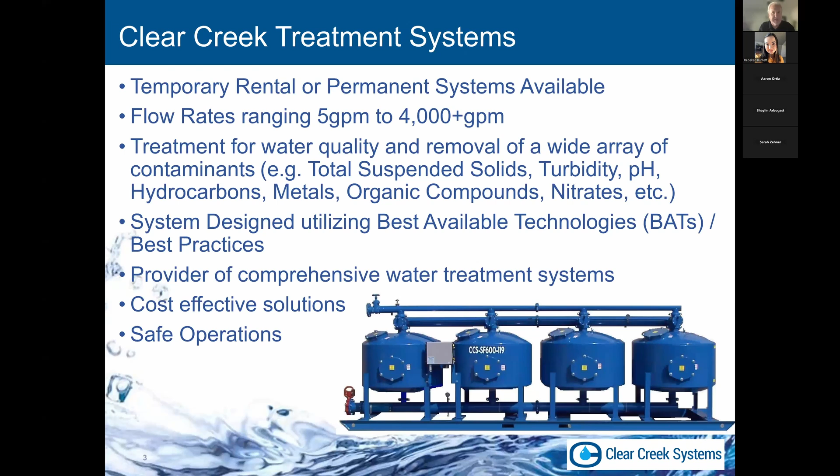Here at Clear Creek Systems, we provide a wide range of equipment and technologies. We're pretty much technology agnostic in terms of solutions that we sell. We don't sell a widget, we sell a solution. The solutions we provide are meant to be efficient, cost effective, safe, and easy to operate and maintain.

What we've learned in 30 years of business is that all industrial stormwater treatment sites are unique. There's no exact formula for success. It's often a combination of technologies that comprise the final solution and ensure compliance. When I talk about compliance, I'm talking about complying with the industrial general permit, both as it is written now and how it might be written in the future. We're not in the business of supplying you something today that won't work in the future with increasing regulation.

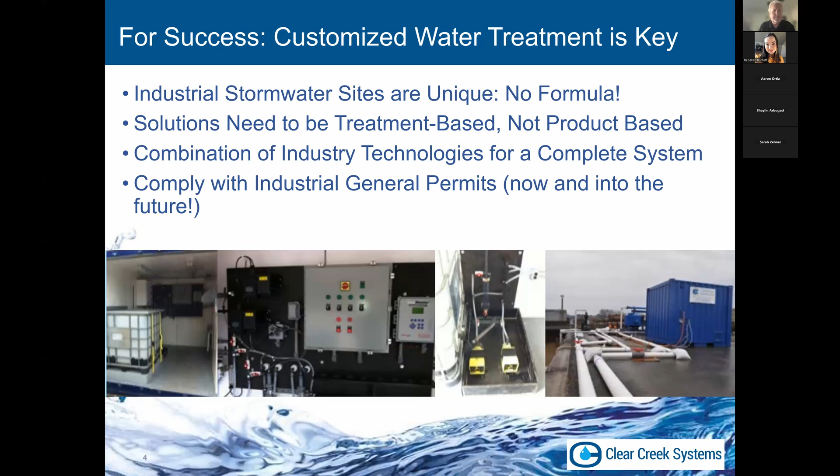Today I'm going to present some of the key techniques and potential configurations used to treat stormwater problems. We're going to meet the needs of regulatory authorities, our clients or customers, the workers' needs so they can do their job safely and efficiently, the needs of litigators or other interested third parties, and finally, what it's all about—meeting the needs of the environment. Make sense?

Planning ahead saves a lot of headaches, and that's something I want to drive home here today. By planning ahead, we'll reduce unplanned expenditures, overspending, and using solutions or technologies that are less than ideal. A systematic approach is directly related to cost savings here.

With that in mind, I'd like to start at the very beginning. This is what planning kind of looks like, if you ask me. We need to take a holistic view of the facility and the current situation.

We look at the stormwater pollution prevention plan. We look at NOIs on the SMARTS website, which give a great history of what our clients have been up against. We'll take a look at any drawings available of the existing facility so we can get a good idea of the layout. We're going to know which permits apply, and we won't forget about any local city, state, or county permits that need to be procured if we're going to put in a treatment system.

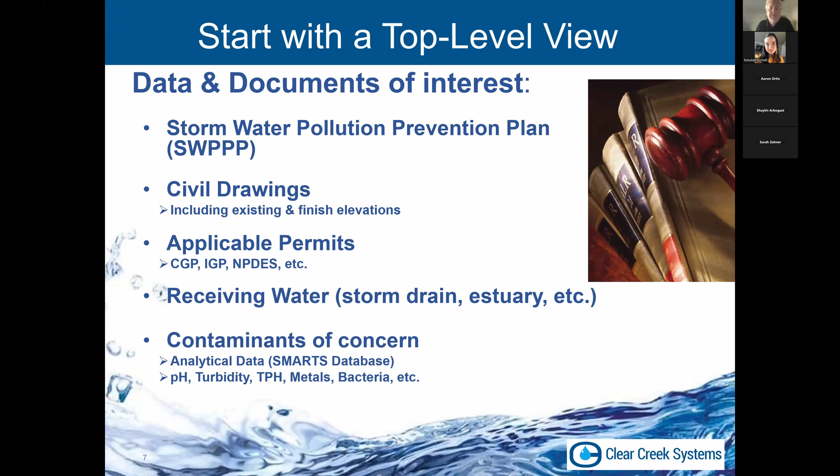When we supply our services, we want everyone to have made all other attempts to get in compliance. That means all your BMPs are being complied with, all your housekeeping attempts have been completed. In a way, your treatment system needs to be a last resort for compliance. These things cost money and take time and have ongoing costs. If you can in any way take care of your existing facility without a treatment system, you should do that. This should be a last resort.

Nobody wants to spend money that they don't have to spend. Usually the customers that need treatment have tried everything, but I just want to underscore that point. So when a project does come to us, the problems are often due to one of these problem areas. I'm not sure if everybody would have heard these terms before, but I'm going to mention them.

TSS, also called total suspended solids, short for total suspended solids. Oils and greases get in the stormwater from leaking trucks or any number of machines that might be operating. pH could be out of whack. Total dissolved solids - these are solids that won't get caught up in a coffee filter or a paint filter. They'll just move right through, like water. Metals, including dissolved metals, VOCs, BODs, COD, bacteria.

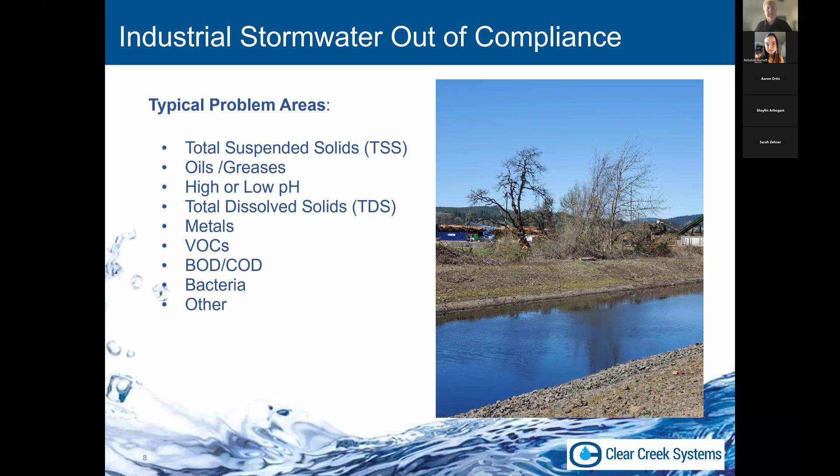Once we know what we're up against, we can start to determine treatment. This is kind of my most important slide that I want to show. If you take nothing else away from this presentation, I'd like you to be familiar with this slide. For each problem encountered, there's a best practice and sometimes a combination of best practices for treatment. There's no formula, no off-the-shelf product that is going to work every time. Each site should be looked at on its own, and that's what we try to do.

Technology providers should come up with a system for treatment that is effective and cost efficient. You don't want anybody trying to sell you a reverse osmosis system if that's not what you need. Effective and cost efficient are a baseline that we need to stay on.

Any provider of any of these stormwater treatment technologies should offer bench testing with actual stormwater from your site that incorporates the proposed treatment technology. We will do this to kind of ensure effectiveness. There's also something called pilot testing, in which a system is put at the site temporarily to prove treatment. It effectively tells you how well it's going to work before any large capital outlay. So bench testing always, pilot testing sometimes - that's the best option.

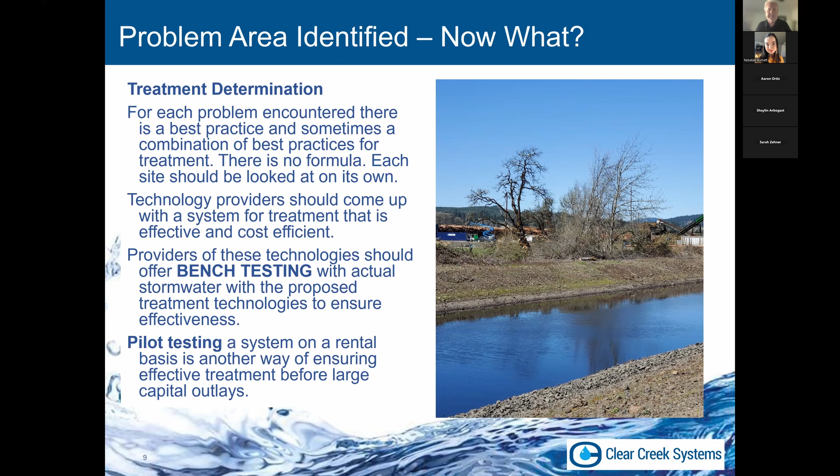So the problem areas often start with things like TSS and pH. TSS, total suspended solids, can be comprised of a lot of different materials - clays, organic debris, metals that get flaked off, even things like leaves and so forth. pH can play havoc with your water chemistry if it's not in the neutral zone. Whenever we're treating stormwater, we want to make sure that these two parameters are under control. It's usually the first place we'll start.

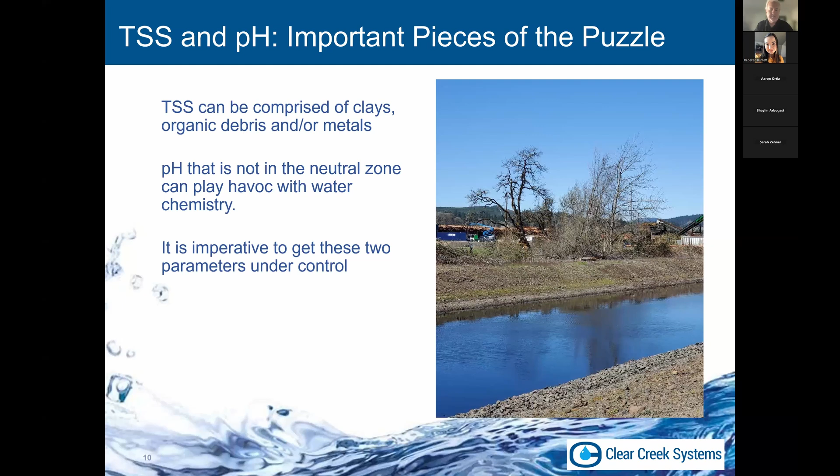I'll often talk about TSS and turbidity, and while they're different measurements, they are related and often go hand in hand. Turbidity is used as a surrogate measure for TSS because it allows for rapid automated analysis of samples. You can measure turbidity in the field, on the fly, online, right away, as existing water quality. You don't have to take a turbidity measurement at an analytical laboratory. It's more convenient for frequent or continuous monitoring.

However, for the lay people, it's crucial to understand that turbidity and TSS are not measuring the exact same thing. Turbidity measures the clarity or the cloudiness of your water based on light scattering properties. TSS is a direct measurement of mass particles suspended in the water. Hope that makes sense.

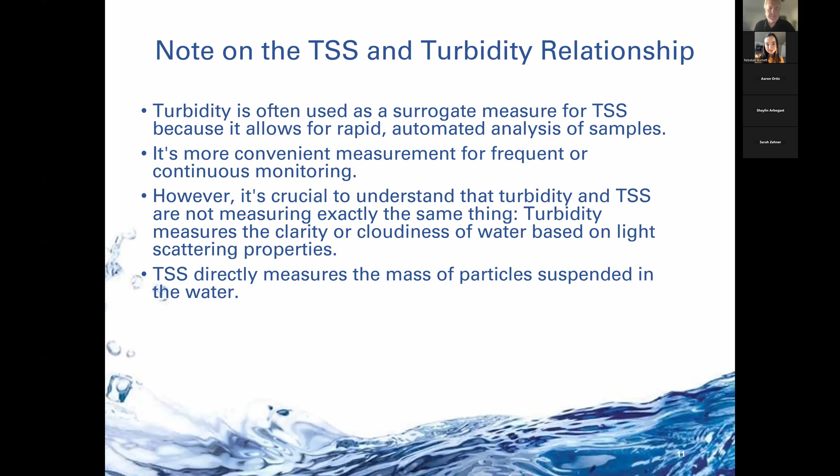I don't know if you ever saw puddles on the side of the road that look like chocolate milk, and they stay that way for days until the water evaporates. Those are signs of clay in your stormwater.

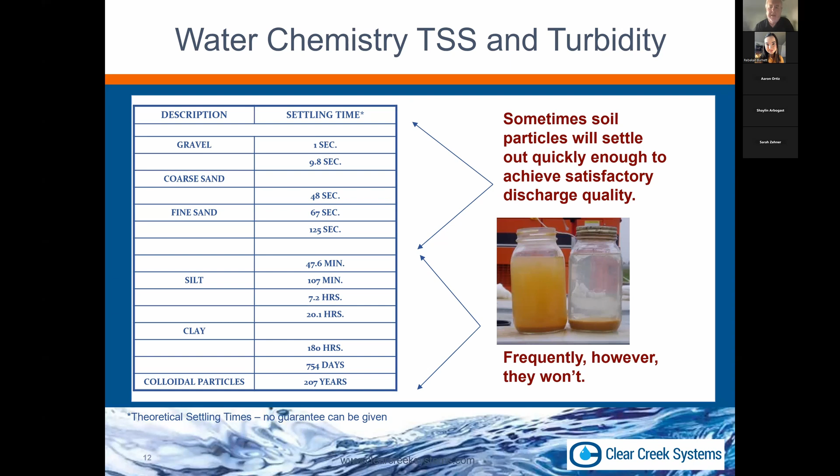One other thing before I move on, I want to note the settleable solids on the right jar. I'll refer to that a little bit later, in a couple slides.

With reference to water chemistry, I know probably everybody knows what pH basically is, but it's important to understand that it's a logarithmic scale. We want to be as close to neutral as we can, often before we discharge. High pH is more alkaline, low pH is more acidic.

I just want to remind people that pH is a logarithmic scale. So a pH of 5 is 10 times more acidic than a pH of 6, and a pH of 5 is 100 times more acidic than a pH of 7.

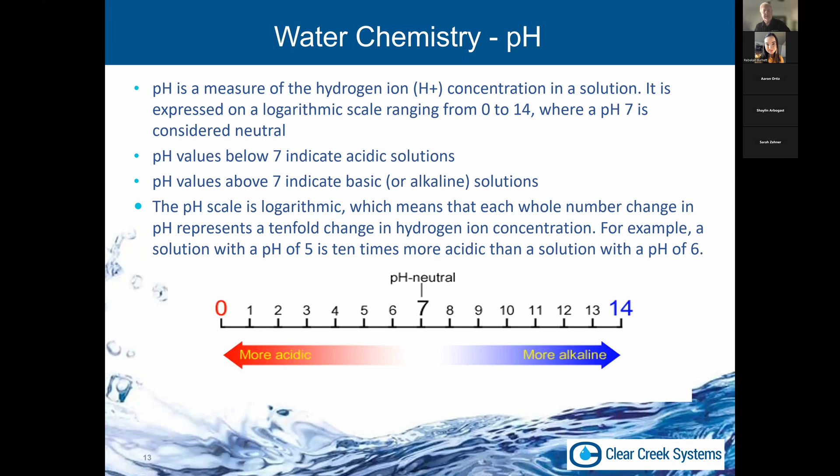Once BMPs are in order, there's not really a lot you can do to affect pH at your site if it's not in the neutral range. When we discharge stormwater, we shoot for between 6.5 to 8.5 on the pH scale. I think the rule is 6 to 9 by the permit, but each site is different, and pH issues can be the result of a lot of different things.

Materials of construction—some galvanized roofs like to give off zinc, for example. Exposed concrete surfaces leaching alkaline compounds. Other natural factors, including local geology, can influence the pH, and decomposing organic matter can affect pH as well, like algae in your ponds.

Things to keep an eye on. Of note, pH can actually be used as a tool to reduce contaminants in your stormwater, so pH changing up and down can be beneficial to treatment. It all depends on your particular situation at your facility.

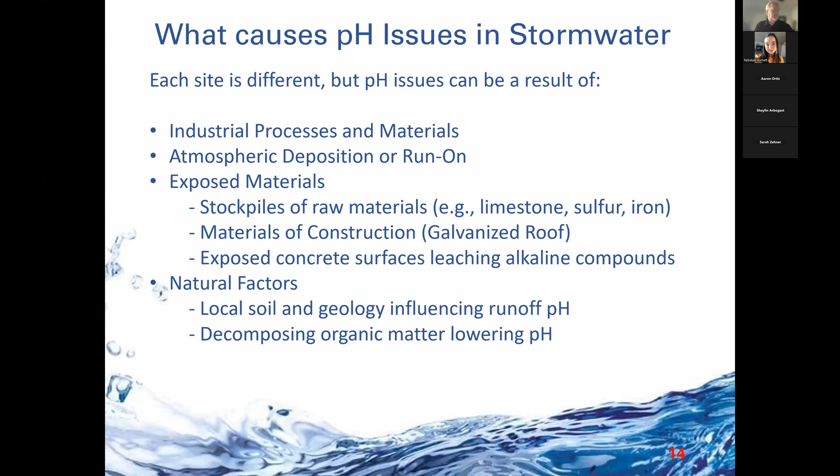If you remember those two jars in the earlier slide, the one where solids separated into a layer on the bottom—we use a grown-up version of those two jars in these photos, except we call them ponds, sumps, or tanks. Here we collect stormwater into a central area, allow it to settle out as much as it can, thereby reducing TSS. It also allows for an overall pH baseline for the entire facility, so if you have a particularly acidic or basic area of your property draining, the rest of the water may tend to dilute that into a neutral solution.

This serves as the main collection area. If we can use the main collection area rather than a lot of different satellite collection areas, we're going to end up reducing a lot of the costs for treatment.

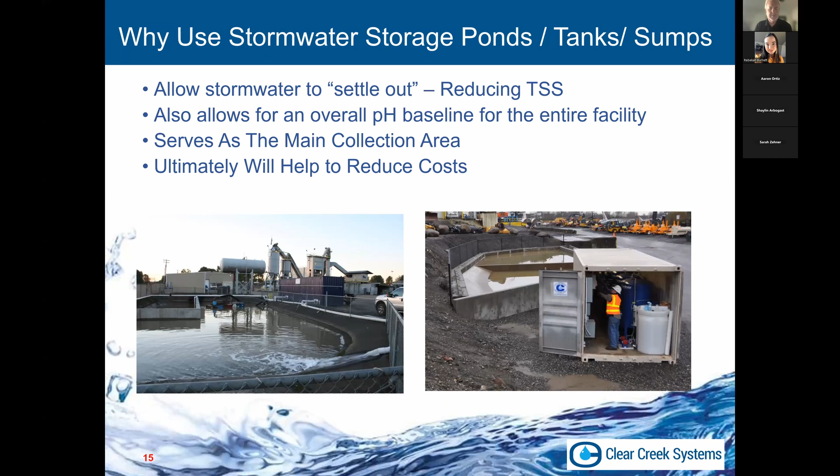From here, we're going to take a deep dive into a treatment train and explain the basics of an industrial stormwater treatment system. Not all of these components will be required—some sites might require more or different components. This is just an introduction into what a treatment train would look like for industrial stormwater that had a lot of different problems.

For a high-acre site, these systems can become quite large. We want to plan drainage to the collection point, our basin, sump, or pond. We want to try to use gravity to move water around, or do we have to pump stormwater from one site to the other because gravity doesn't work in our favor? These are things we should plan for.

Is there space for treatment near the discharge point, or are we going to have to pump a long way to discharge treated water? Is there electrical power at the site, or is that a concern where we need to bring in power poles?

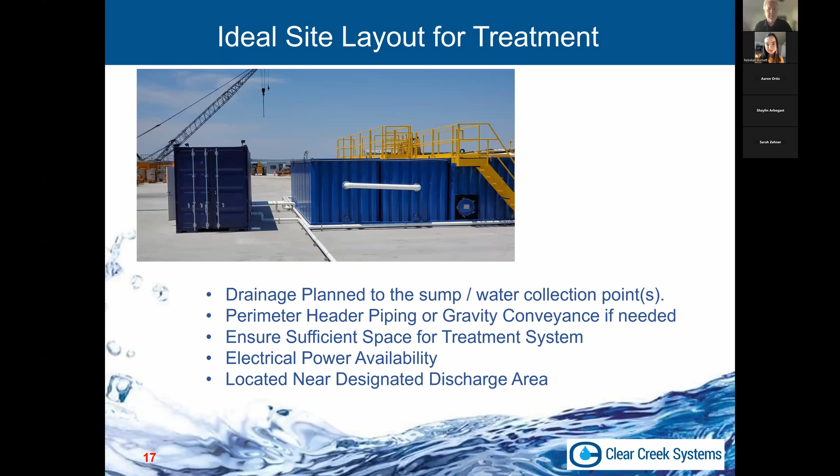Sometimes there's no space, or space is at a premium. We can put a tank underground. This would be an underground water storage tank at this facility.

There are a lot of different options, but I want to point out that this time of year I always seem to get a Stormwater Awareness Week notification. It's perfectly placed because it helps me transition into the stormwater season, and I'm reminded that dry weather installation is always preferred compared to a wet weather installation.

If you have a problem, now is the time to start planning. Don't wait till your next lab result comes back and shows you still have a problem. There's nothing wrong with doing a little planning right now so you can be ready, once storm season approaches and we start to get inundated—that's the busy season for companies that do what ours do.

First in line is often the first one that gets helped, and the timeline gets extended when everyone waits to the last minute. That could potentially lead to increased costs, increased fines, a need for overtime.

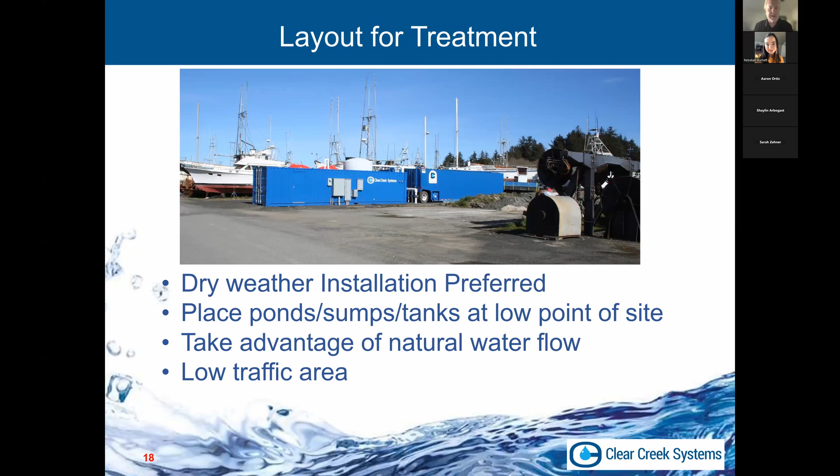So we're in our storm season now, and we have our collection basin, pond, or sump. Some solids will stay in the basin, just like in that jar I showed earlier. But we're going to start to need to treat water so we can make room for the next storm coming in, and hope you're ready to go through the process.

This is kind of a deep dive, but this is exciting stuff here, and this is where the magic starts to happen. This is the crux of what I wanted to present to you guys today.

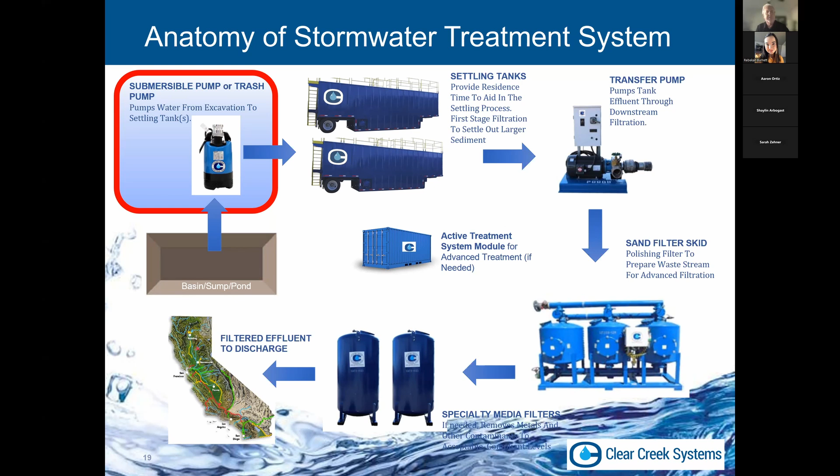From our sump or basin, we need to start pumping that water. The water that comes through for treatment is often pumped with one of two styles of pumps: submersibles, which can be completely submerged into a pond, or trash pumps, which sit on the side of the pond. And they each have their benefits.

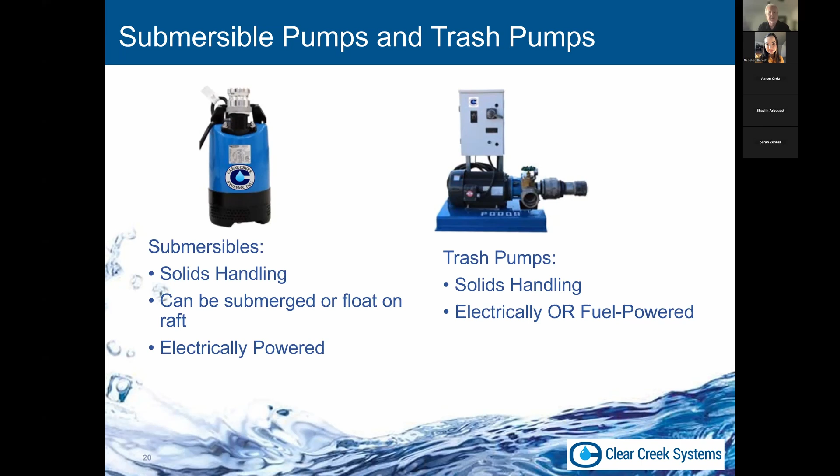Submersibles can be submerged or float on a raft. The trash pumps usually sit on the side and can be electrically powered or powered with an engine—a diesel engine—or a generator. Either one could be powered with a generator. These are the common ones used for pumping out of our pond.

What does that pond look like? It could look like a lot of different things. I'm not saying this is an industrial stormwater treatment pond, but they can get really murky and dirty.

In this case, we have our pump set, and we have our submersibles, which are floating on a raft. If we put a submersible pump into the bottom of our treatment pond, sitting on the ground, we're going to be stirring up a lot of that stuff we want to settle out.

So rather than sucking up all that muck on the bottom, we usually try to suspend them either floating on a raft or some other means, so we're not sucking right from the bottom. Same if we're going to use one of those trash pumps—we'll put the intake for the pump slightly above the ground level so that we're not sucking in all that dirt and debris.

This is one safety thing I like to point out too, every time I show this slide: these ponds can be muddy, they can be slippery, and the sides can be steep. Please consider putting some kind of flotation device there in case somebody falls in and they can't get out—say, like they're doing an inspection in the middle of the night, for Thanksgiving when nobody else is around.

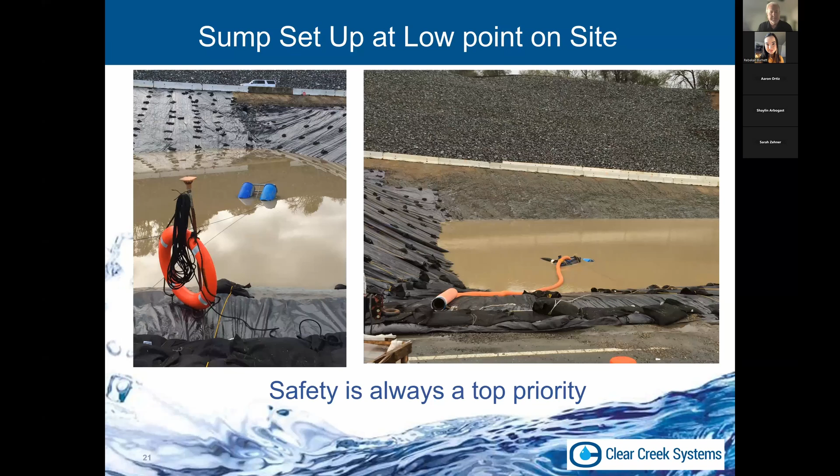There needs to be some thought given to that if you have an unsteady area to work around these ponds. All right, so we're pumping from our basin, sump, or pond into some settling tanks.

The idea of these settling tanks is to give another area for water to settle out. So we have our basin sump pond. It's dirty, you saw the picture of what that could look like. Now we're pumping water out.

We're going to be able to get water into these tanks and settle out some of the solids that get swept in. These tanks also allow for a little bit of equalization from the water pumped in from the sump and pond. In a rainstorm you may get inundated into your basin, sump, or pond. These settling tanks allow for equalization, meaning a steady flow rate through the rest of the system. It's kind of a buffer. So a lot of things going on, but we're getting additional settling and equalizing flow so we can operate at a steady rate of flow.

Of note, one could use another pond instead of these tanks. I didn't show that pond, but I thought I'd mention it - you don't have to have tanks if you have the real estate for another pond for settling.

Some quick notes on tanks. Commonly known as frac tanks, or used to be known as Baker tanks. They're pretty easy to come upon, not that expensive, especially if you can find one used on the market. They're a little tight at the moment, but they come and go in terms of how available they are.

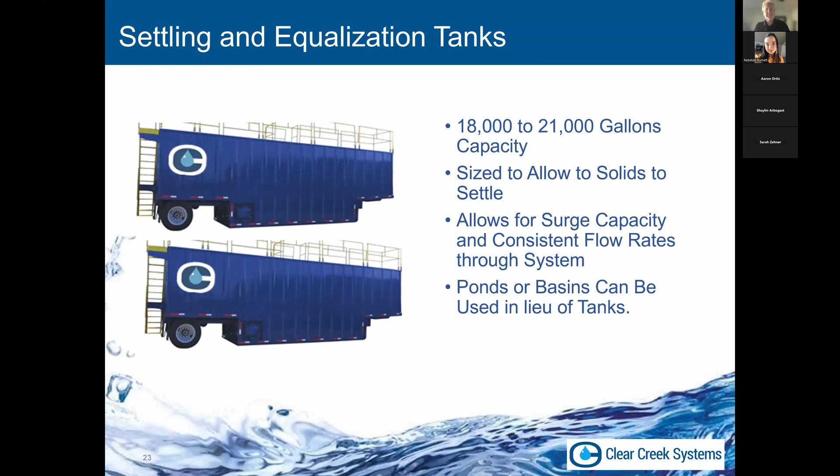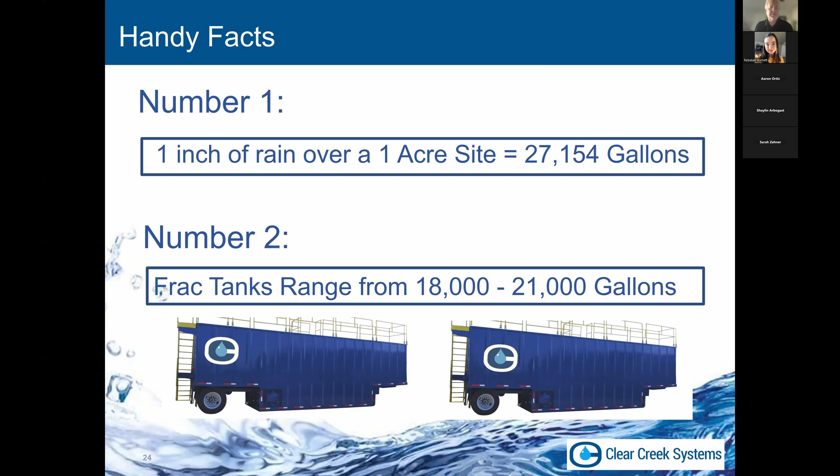A couple of handy facts, just to give a perspective: an inch of rain over a 1 acre site, you're going to collect about 27,000 gallons of stormwater. And again, the frac tanks are 18 to 21,000 gallons. So you probably would want at least one or two tanks in that scenario. But if you have multiple acres, you can do the math and figure out basically how many tanks you might want to have.

So now we're going to move on to another transfer pump. It's very similar to what I already showed you - nothing too different, except that we hardly ever see submersible pumps in this area. It's always going to be a land-based pump hooked up to some kind of electrical power, and these pumps are sized for your treatment rate. So if your QISP tells you you need 400 gallons per minute, you're going to get a 400 gallon per minute pump, and that pump will be sized to overcome the pressure drop through the various treatments that follow.

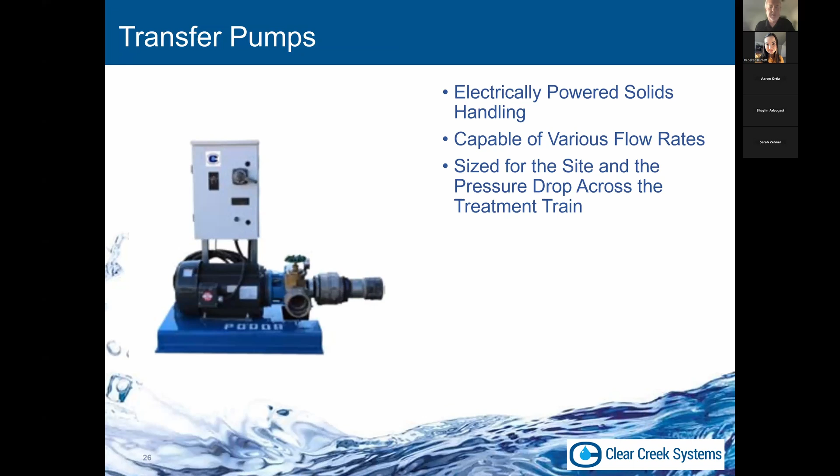Now we're ready for some filtration, and personally, I like the use of a sand filter, and I'm going to talk about that sand filter a little bit.

There are different types of filters - bag and cartridge filters. The thing that separates the sand filter from bag and cartridge filters is that when the bag filter fills up, somebody has to stop the system or close off flow, open it up, and change out the filter sock, then put it back online. I've been around long enough to know that's very inconvenient when everybody's off at Christmas, New Year's, and Thanksgiving, or if they have other work to do at the plant - they cannot be running out to the water treatment system to change bag filters every 5 minutes, 10 minutes, hour, 12 hours, or even every day. It can become a nuisance. I like the idea of the sand filter because sand filters will automatically backflush themselves.

They'll automatically clean themselves. Each one of these four pods I show here contains a layer of sand and gravel, and water flows through the top to the bottom and out the bottom, in this case to the left. On prescribed intervals or on a pressure differential, the sand filters, with the control panel there, will backflush themselves. And where does that water go?

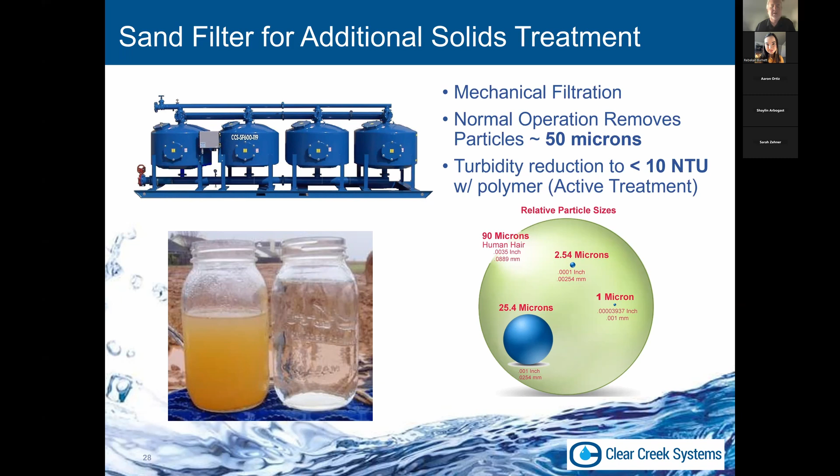Often, with the correct polymer selection, we can reduce turbidity to 10 NTU after sending the water back through a filter, and that's kind of what's represented in that picture. So one jar is prior to polymer introduction, and the jar on the right is with polymer introduction.

So how do we know if polymer's needed? Well, when we do our initial site reconnaissance, we're going to know if TSS is high. We're going to know when we do our bench test that TSS is high, and how certain polymers will react, and we're going to measure that coming into the system.

If we're out of compliance, we're going to again retreat with additional polymers. And if there's a reason why our turbidity remains high, those tanks will fill up. Obviously, the water won't be allowed to go anywhere, it'll go in a circle. And once they reach a high level on that tank, the system will shut off and alarm, and somebody's going to get a phone call that there's a problem.

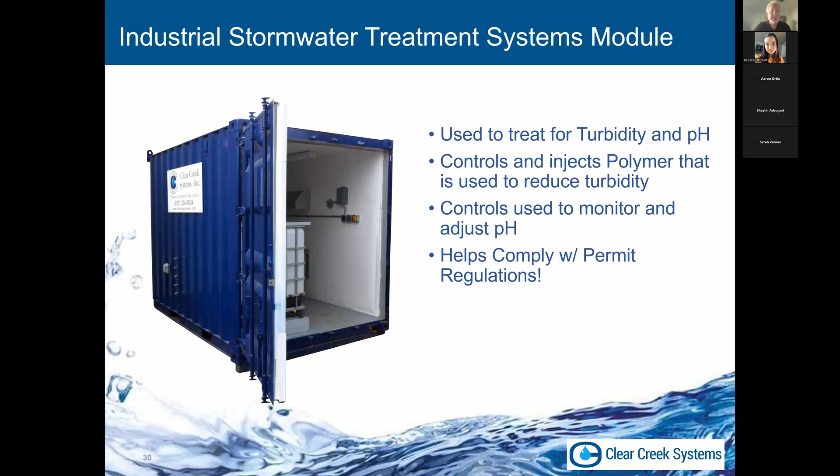So as we saw in my previous slide, the fine particles can get through our sand filter. If we dose the stormwater with a special polymer, our first go-to is something called chitosan. It's called chitosan, and that is made from crustacean shells.

They're becoming bigger and bigger. And as they get heavier or less buoyant, and the charge on the particles starts to equalize, they start to fall out. And a lot of times it doesn't take a lot of time to do that. It's another reason why we ask for about 20,000 gallons of storage for every 100 gallons a minute, to allow these particles to fall out.

The whole idea is to fill up those tanks with sludge and TSS. We don't want that, but it has to go somewhere, and yes, it becomes a maintenance item. Those tanks over a storm season, and your pond for that matter, can become feet thick with solids, and you will have to vacuum those out once in a while. But that's the whole idea, to get rid of this from your stormwater.

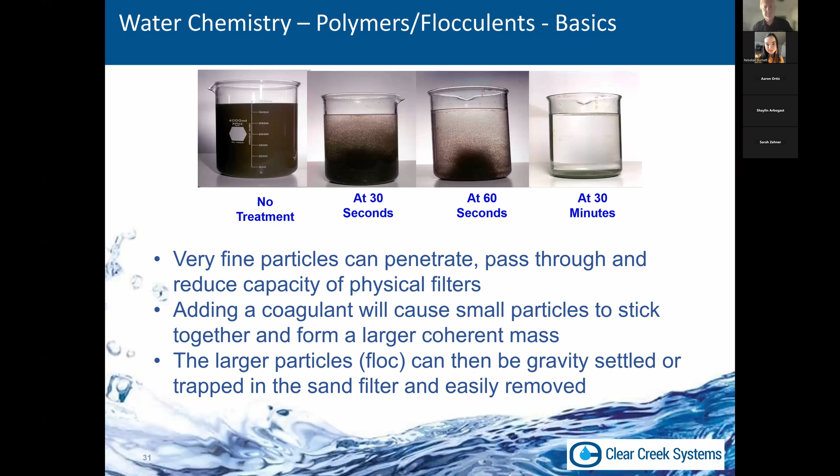Again, just some other photos of how that works out. Small particles bind together to make large particles, so they fall out of solution. Particles are then effectively filtered.

One other small minor point here, but I feel it's very important, is that if you have a contaminant concern like nickel, copper, lead, or iron, and that's coming through in your lab work, and you don't know if it's dissolved or not - even if it is dissolved, we find that these metals are often attached to these particles that we're filtering out. So if we can filter out the particles from the water, we're oftentimes taking out those metals as well. It becomes like a double-edged sword, where we can start to make headway on our stormwater quality.

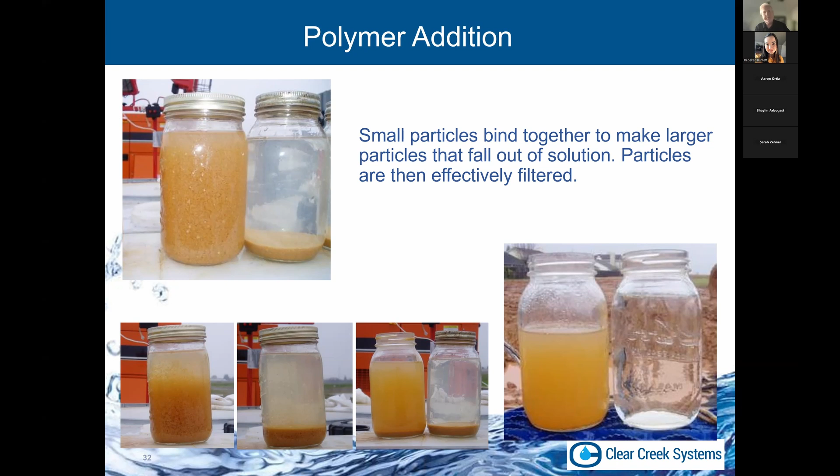I already mentioned that if we know we have a problem with turbidity or TSS, we'll inject polymer at the very beginning of the treatment train, where I show the recirc button or recirc line. But if we're out of compliance with pH or turbidity, we go back for more treatment. If we're acidic, we're going to add some caustic. If we're too caustic, we're going to add some acid. In this manner, we'll be able to keep pH in line and not have an exceedance. Again, the active treatment system module monitors continuously for compliance.

So now we have our crystal clear stormwater, as you might have seen on the previous jars on the right, the clear stormwater coming out. Now, from there, we can start to treat at the molecular level with specialty filters. At this point, our TDS and other microscopic pollutants that we can't see are now effectively filtered out. Hope everyone's still with me here.

So we're done taking out all the TSS. We have clear water, we have a neutral pH. We can send the water through media vessels that hold various products, and these various products remove various constituents. These vessels - is what we call them, not tanks, we call them vessels - are sized for the flow rate, and often they're in a lead lag position. The lead lag position is great because the lag vessel will always serve as kind of an insurance policy if you have breakthrough of a constituent on your first vessel.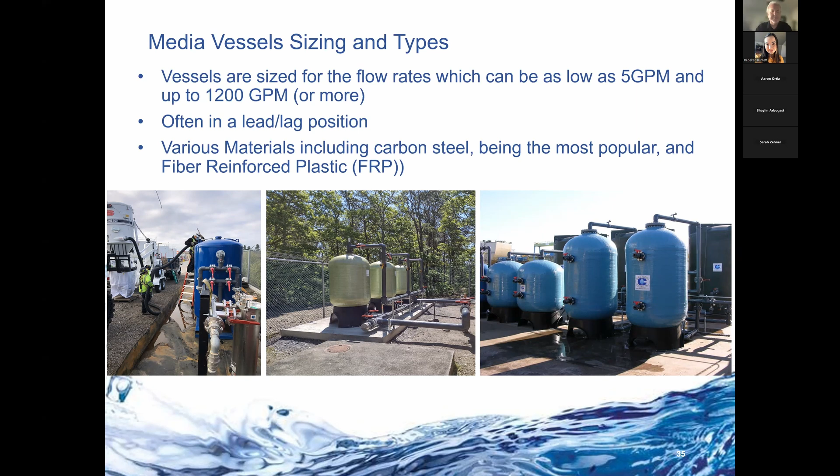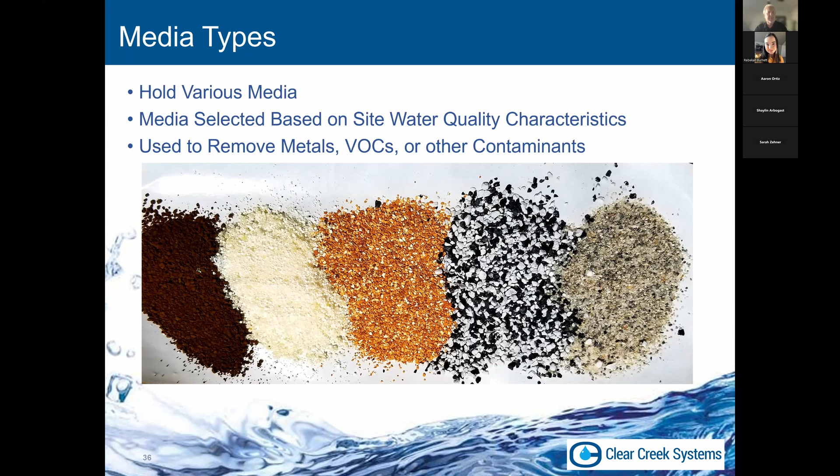All right, so the media that goes into these vessels is specially selected to treat the remaining contaminants of concern. There are various medias, again used to remove metals, VOCs, or other contaminants, and these are actual medias that are used. Some of the more popular medias include activated carbon. For centuries, activated carbon has been used to treat water and remove contaminants.

Often used for treating VOCs, and they can be impregnated carbons designed to treat other targeted constituents. We have some zeolites, which can often be used to remove trace metals or heavy metals. We use blends of media, and there's other media as well. Really, sometimes they're not enough, and we need to move on to more exotic medias.

I show a picture here of something called ion exchange resin, which is a manufactured product designed to remove specific, hard to remove constituents. There's a wide variety of types. There's ones that remove PFAS. There's ones that remove perchlorate and other metals.

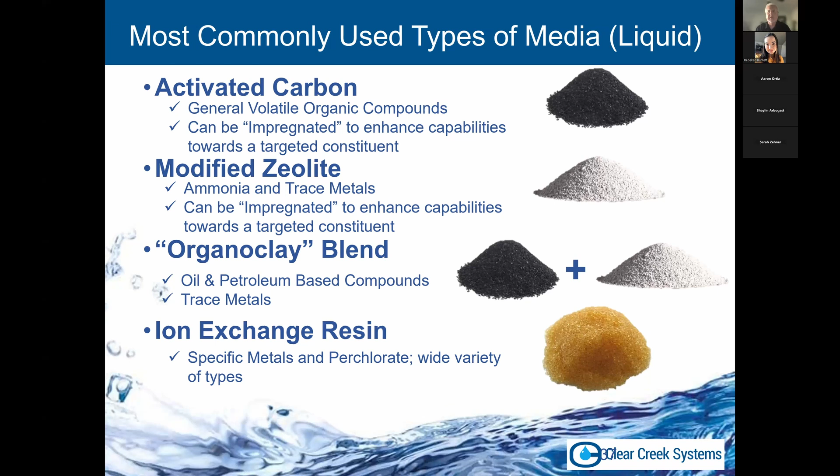They're pretty pricey though, so we try to stay away from ion exchange resins unless there's nowhere else to go. Again, these are the types of things we'll decide once a bench test is completed. You don't want to go spending $50,000 on ion exchange resin without doing a bench test to make sure it's going to work. Nobody's going to be happy if it doesn't work and we need to get a different resin. We use our experience to select which are best and most cost effective, and the media selected should be part of the bench test that the provider does for you.

Getting to the end of the treatment train now, we may have a need for other types of treatment, and this is where that would go in. So we've effectively cleaned all the solids, all the water, as much of the TDS as we can get rid of, but we could still have lingering problems.

It's at this point, and only at this point, would we consider even higher dollar treatment. And this higher dollar treatment needs to be protected, and we need to have the highest quality water we could possibly get before we're going into it, because it needs protection.

Probably in order of magnitude of cost, we can at this point treat for bacteria and COD by using a UV system. That's basically just UV light. UV light to treat bacteria cannot have any shadows, so by removing all those particles in the water, we reduce the likelihood of shadows and bacteria getting past us. So we always want to make sure that we treat as best we can before we go into a UV system.

And similarly with the membrane technologies and RO systems, RO is commonly used to remove salt from water. Very expensive, high maintenance, not desired to have them, because if you remove salt from water, you're going to get a very brine solution, and that's often hard to get rid of in itself. So we recommend not allowing salt water to come into your facility if that's a problem. Figure out a way to not have that happen.

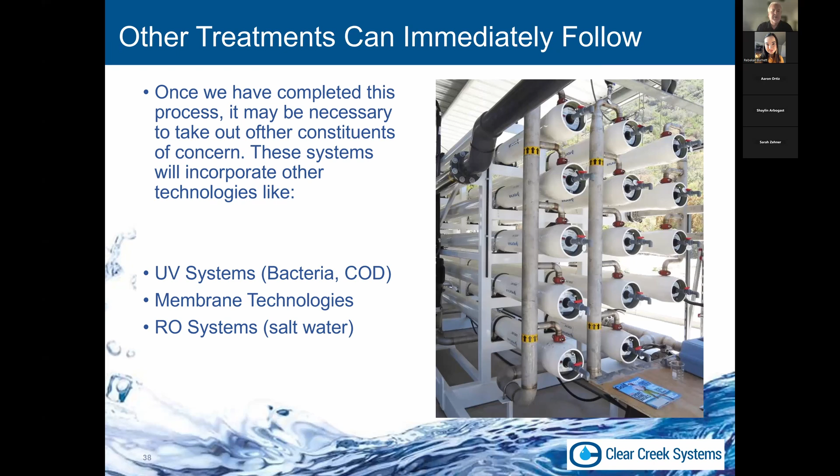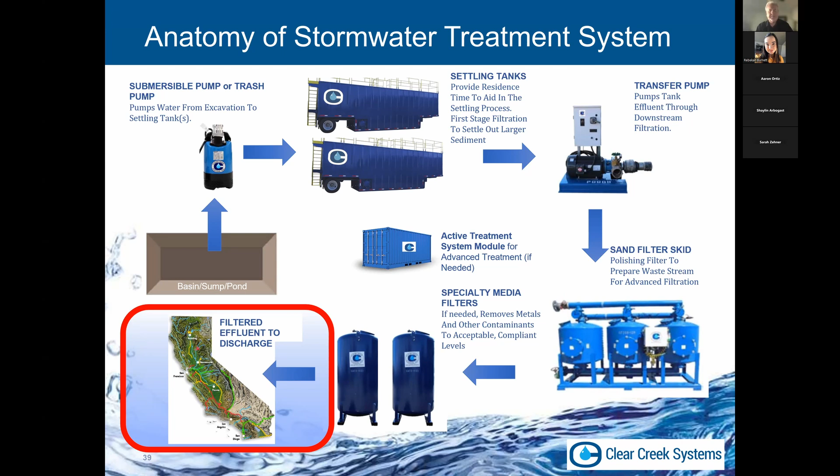So I know we talked about a lot of these technologies, and there's no formula here. Each of these technologies I talk about, I have given an hour presentation on themselves, and I've spared you from that. I tried to keep it at the top level, but undoubtedly there will be some questions. If anybody does have any questions, feel free to contact me, or get more information on your own with the old artificial intelligence that everybody's using lately. If anybody's interested in learning more, going on a deeper dive on any of that stuff, please let me know.

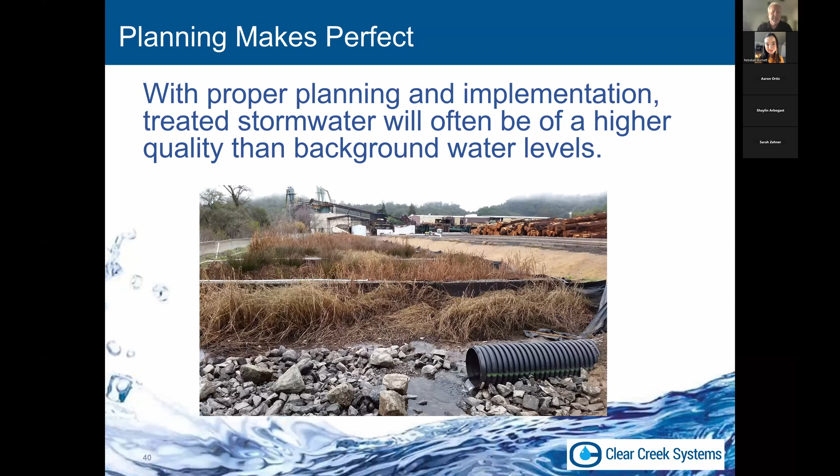So kind of wrapping up here, with proper planning and implementation, treated stormwater will often be a higher quality than background water levels, which is really typical that's the case. And finally, we did all this work. We can now discharge our stormwater without threat of further action. For anybody on this call who is having anxiety whenever they get their stormwater analytical results back from the lab, I haven't been in your shoes, but I have seen my customers reach the promised land, and that's available to you. I wish you luck on any problems you have. If you ever have any questions, please let me know. And with that, I will wrap it up.

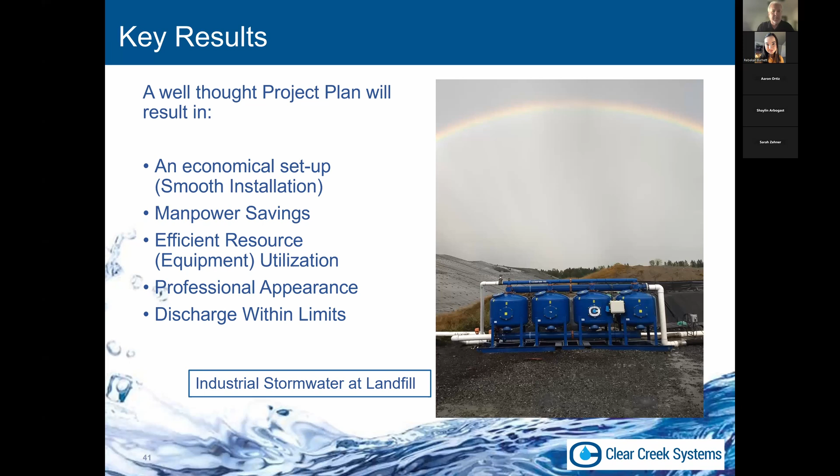A quick couple of slides to show you how neat your system should look, and what it could look like. And that's it. Thank you very much.